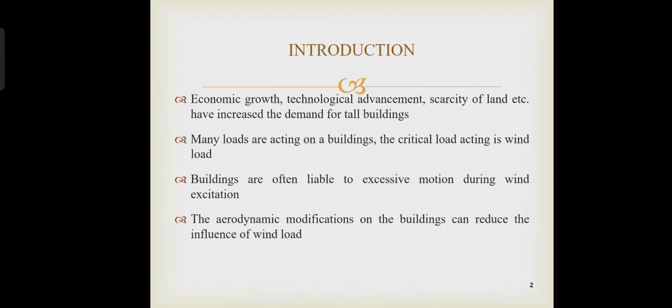Aerodynamic modifications on the building can reduce the influence of wind load.

Aerodynamic forces on tall buildings. The development in construction technology and the social demand for tall structures have created a recent trend for tall structures. The structural safety of tall buildings often depends on structural design to withstand wind load, whereas the habitability of the building is often hindered by wind-induced vibrations.

The height of the building and the wind velocity are directly proportional to each other. Under the action of wind, tall buildings can oscillate. The effect of aerodynamic forces on the building damages structural elements, reduces life, and creates crack formation. Due to this, excessive building motions can also be created.

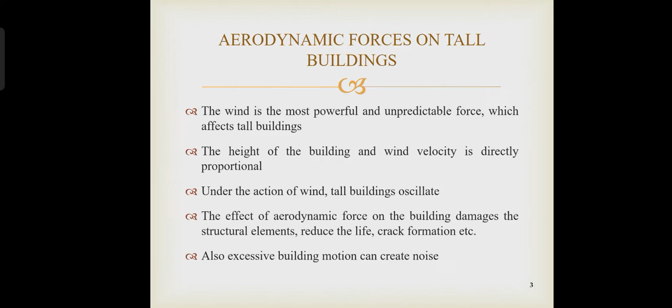Now, the types of wind acting on tall buildings. Tall buildings are wind-sensitive structures, so lateral wind loads imposed on the building are governing factors in their structural design. The wind acting on buildings includes along wind, across wind, and torsional wind.

The along wind deflects in the direction of wind. In the case of across wind, it deflects in the direction normal to the direction of wind. And torsional deflection is due to the non-uniform wind pressure over the surface of the building.

For most super tall buildings, it is often found that across-wind dynamic response dominates the wind load and sometimes causes excessive motion in terms of building serviceability criteria, while the along-wind force spectrum mainly reflects the approaching wind turbulence properties. The across-wind force spectrum is largely determined by flow separation and vortex formation, called signature turbulence.

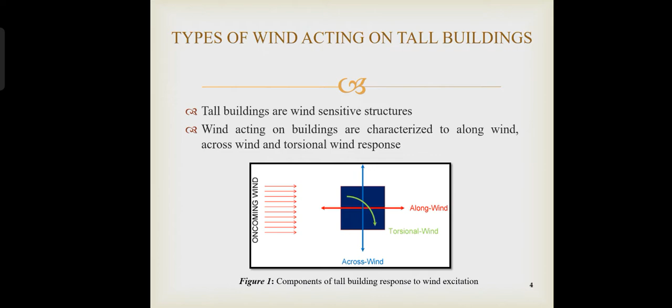Along wind response: the along wind response acts in the direction of mean flow. It occurs due to the static motion of wind. Static wind effect primarily causes bending and twisting of the building, and the movement of the building is along the wind direction. The wind motion primarily results from pressure fluctuations on windward and leeward faces and generally follows fluctuations in the approaching flow.

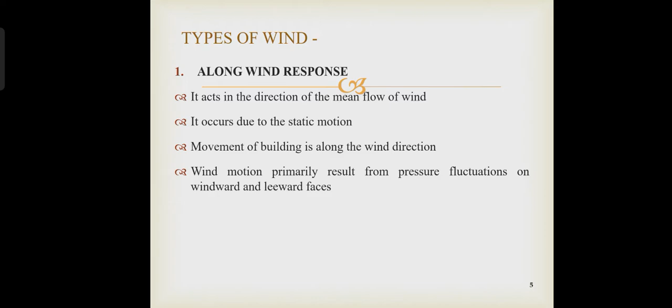Across wind response: the term across wind is used to refer to transverse wind. It acts perpendicular to the direction of mean flow of the wind and occurs due to the dynamic motion of wind. For tall buildings, wind gusts cause fluctuating forces on the structure which induce large dynamic motions including oscillations, with the building moving across the wind direction.

The across-wind response often dominates over the along-wind response. The common source of across-wind motion is associated with vortex shedding. The across-wind oscillations can be excessive if the building has low damping. When a building is subjected to wind flow, the originally parallel wind streamlines are displaced on both transverse sides of the building, and the forces produced on these sides are called vortex shedding.

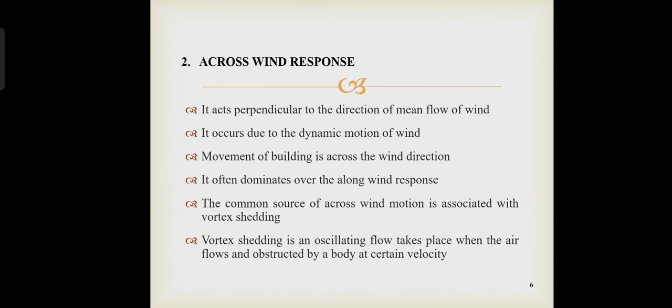The vortex shedding is an oscillating flow that takes place when the air flow is obstructed by a body at a certain velocity.

The vortex shedding depends upon two types of frequency: first, the fundamental frequency of the building, and second, the frequency at which the vortices are shed. When these frequencies coincide, resonance occurs, causing excessive oscillations in the transverse direction, and thus the entire structure vibrates and causes failure to the structure.

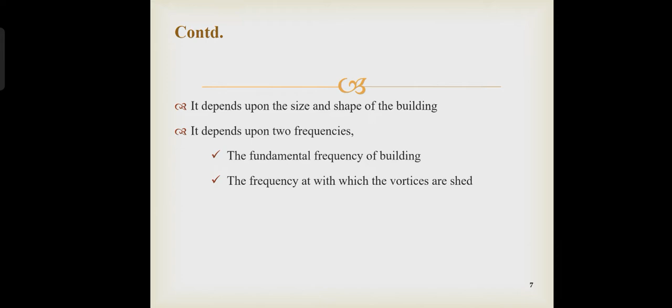Next is torsional wind response. The torsional motion is developed due to imbalance in the instantaneous pressure distribution on each face of the building. If the distance between the elastic center of the structure and the aerodynamic center is large, the structure is subjected to torsional moments that may significantly affect the structural design. The torsional wind has significance depending upon the geometry and structural system of the building.

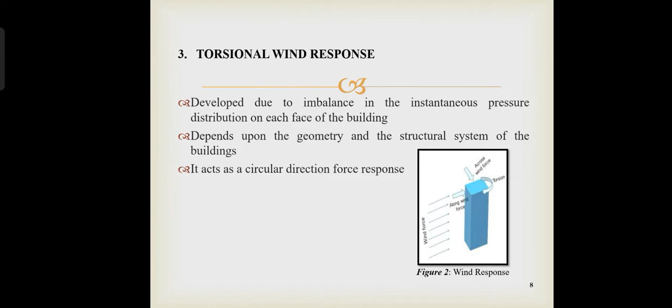Now, comparing along wind response with across wind, the across wind is more sensitive to wind speed. At lower wind speeds, the along wind normally dominates, but with the increase of wind speed, the across wind takes over.

Now we are moving on to wind tunnel tests. Wind tunnel testing is a powerful tool that allows engineers to determine the nature and intensity of wind forces acting on a complex structure. Wind tunnel testing is particularly useful when the complexity of the structure and the surrounding terrain result in complex wind flow.

The test predicts the wind loads and response of the structure, structural components and cladding to a variety of wind conditions. As the height of the building increases, wind load becomes increasingly important for efficient and reliable design. It is common to conduct wind tunnel tests for tall buildings having a high aspect ratio, that is, the ratio of height to width.

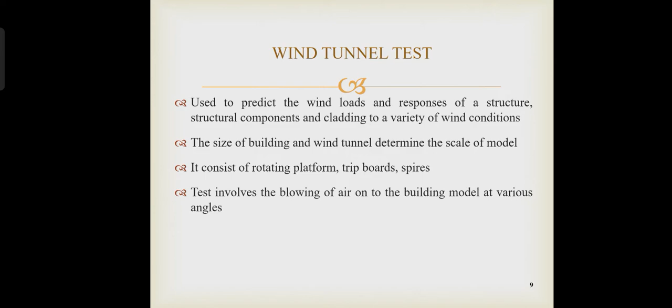The size of the building and wind tunnel determine the scale of the model. It consists of a rotating platform, trip boards and spires. The test involves blowing air onto the building model at various angles. The figure represents the wind tunnel testing laboratory at the University of Florida, and the next figure represents the model of wind tunnel testing of Burj Khalifa at a scale of 1:500.

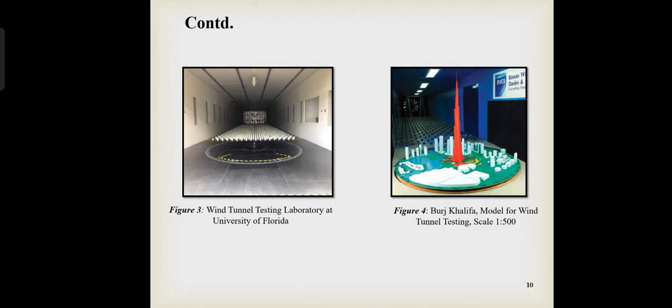Now we are moving on to aerodynamic optimization modifications which can be done on a structure. A tall building can be defined as a mast anchored in the ground, bending and swaying in the wind. The velocity of wind increases with height, and as a result, wind effects increase on tall buildings.

It is an approach normally taken when building aerodynamic mitigations are found necessary, but only limited shape changes can be permitted in order to keep the building's overall concept unaffected. Based on the impact of modification on the outer architecture of the main structure, aerodynamic modification can be categorized into two: minor modifications and major modifications.

The figure represents the flowchart of modification. Minor modifications are aerodynamic ones which affect the structural and architectural design to a minor extent. Modifications to corner geometry such as chamfered corners or corner cut, corner recession, slotted corners, corner roundness, through openings, and fitting of fins and vented fins are affiliated with such modifications.

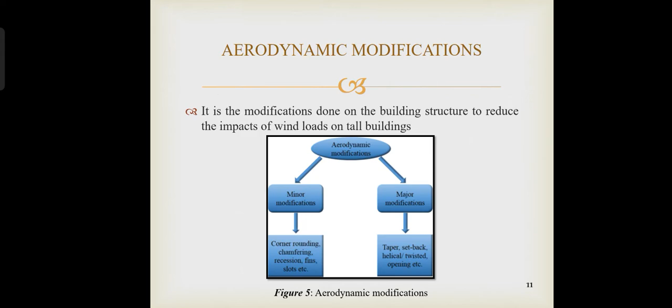On the other hand, major modifications are aerodynamic ones which considerably affect the structural and architectural concept. Examples of major modifications include modification of tall building shapes, addition of openings and vertical or horizontal slots to the buildings, twisting or rotating of the building, setback, and tapering.

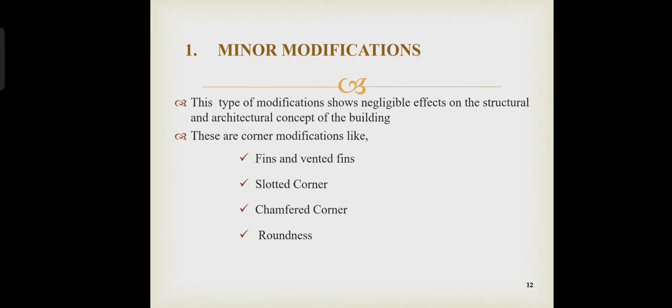Minor modifications show negligible effect on the structural and architectural concept of buildings. These are fins and vented fins, a slotted corner, chamfered corner, and roundness.

Fins and vented fins: the basic square or rectangular shape of a building is modified using small fins or vented fins. These act as a screening system, decreasing the across wind response because of the increase in the projected area perpendicular to the wind.

Next is the slotted corner, a very effective modification technique to reduce along and across wind response. Slots at the corners allow bleeding the air through it.

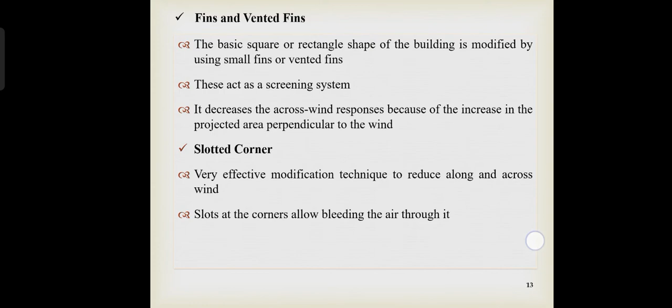Next, the chamfered corner. The along wind fluctuation force is not affected much, but these modifications are effective for reduction in across wind fluctuations for a low angle of incidence.

Corner recession effectively reduces both the along wind and across wind response. This modification is similar to the chamfered corner and can be done in single, double, or triple form.

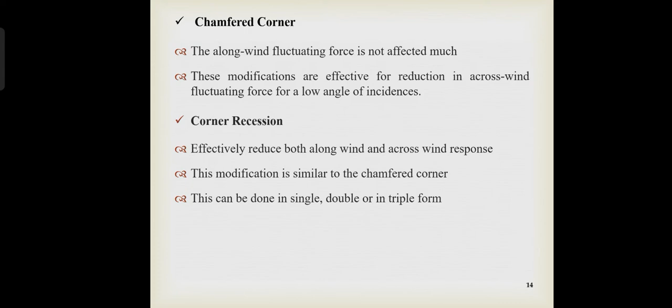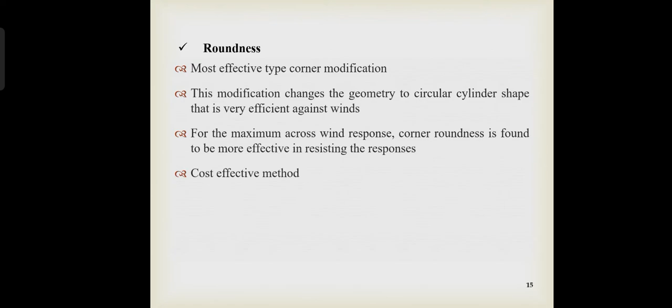Next is roundness, the most effective type of corner modification. This changes the geometry to a circular cylinder shape that is very efficient against wind. For the maximum across wind response, corner roundness is found to be more effective in resisting the response, and it is a cost effective method also.

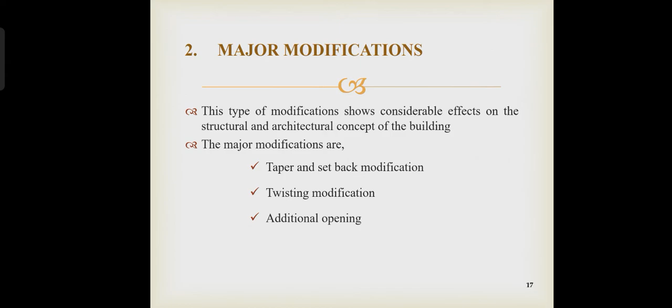These are the classifications: taper and setback modification. This modification has a more significant effect on the across wind response than on the along wind response.

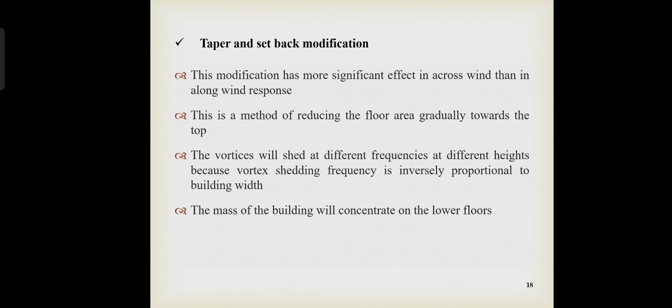This is a method of reducing the floor area gradually towards the top. The vortices will shed at different frequencies at different heights, because vortex shedding frequency is inversely proportional to building width. The mass of the building will concentrate on the lower floors.

Twisting modifications: twisted buildings are effective in reducing vortex shedding along the height of the building. This modification is done by providing twisted angles, mainly 120 degrees, and the effectiveness of twisting increases with increase in the twisted angle. Next is additional opening.

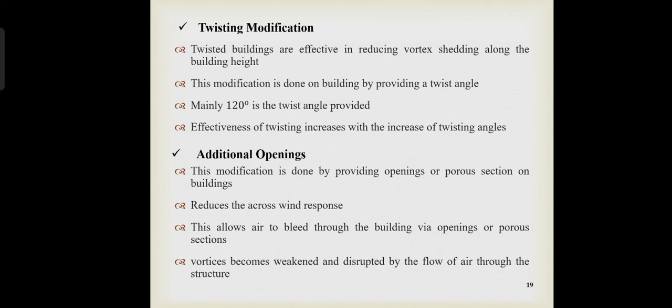Now we can go through case studies. First one is Burj Khalifa, which you all will be familiar with. Burj Khalifa is the world's tallest building, having a height of

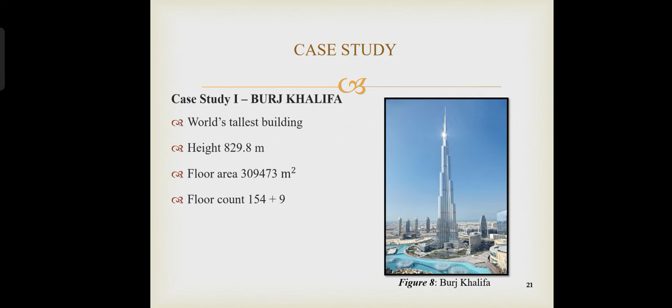829.8 meters and a floor area of 309,473 meters square. The floor count is 154 plus 9. The aerodynamic optimization technique used is tapering and setback corner modification, which shows effective in taming the wind response.

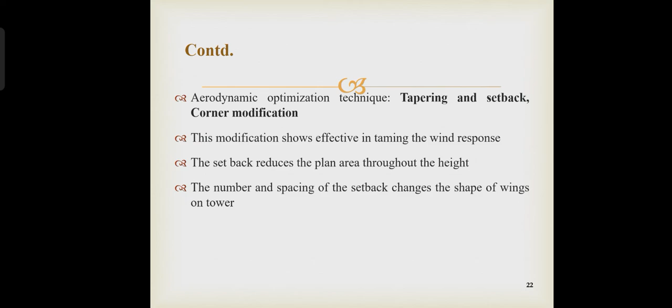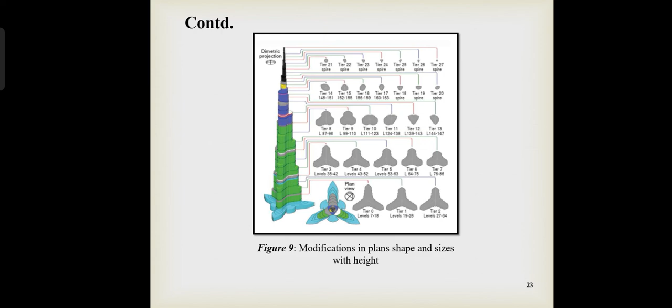The setback reduces the plan area throughout the height, and the number and spacing of setbacks changes the shape of wings on the tower. This is the modification in Burj Khalifa, and the shape, size, and height are mentioned here. This modification will reduce the vortex shedding over the height of the tower.

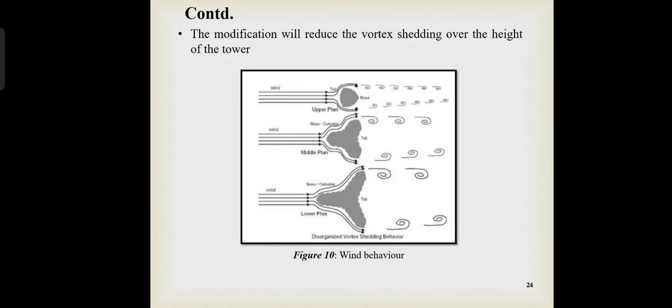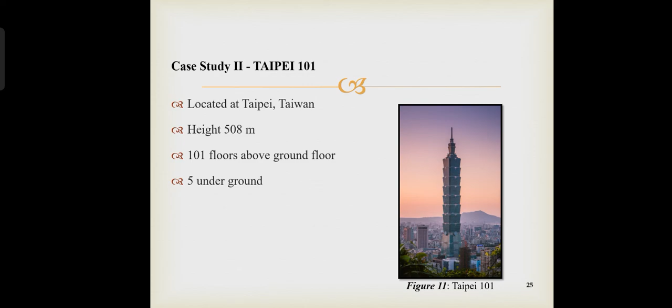Next is Taipei 101, located at Taipei, Taiwan. It has a height of 508 meters and a floor count of 101 plus 5. The aerodynamic optimization technique used in Taipei 101 is setback and tapering.

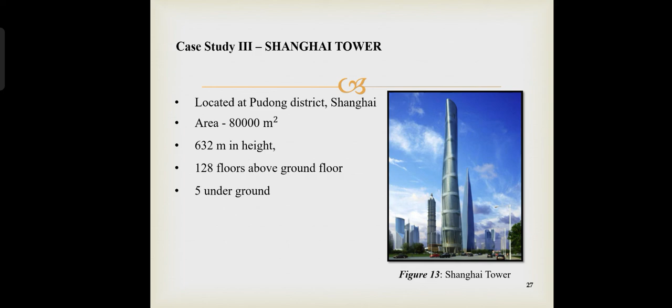Next is Shanghai Tower, located at Pudong District, Shanghai. It has an 80,000 meter square area and a height of 632 meters, with a floor count of 128 plus 5.

The aerodynamic optimization technique used in this is tapering profile, twisting, and rounded corners. It is in rectangular shape. The curved corners of the triangular cross section act to minimize the wind load, and a 120-degree twisting is adopted.

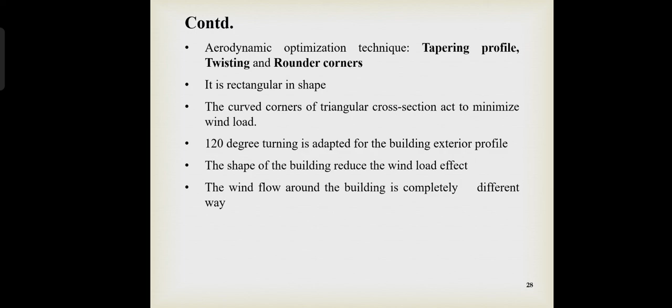Now we are moving on to the conclusion of our session. Wind-induced load and motion typically governs the design of lateral load-resisting systems in tall buildings. Aerodynamic optimization is aimed at solving the structural resistance against wind, so appropriate modification in the building can reduce the effect of aerodynamic forces.

It is important to have a reasonable assessment of the effectiveness of various aerodynamic options in the early design stage, so that the potential pros and cons can be evaluated in the decision making process.